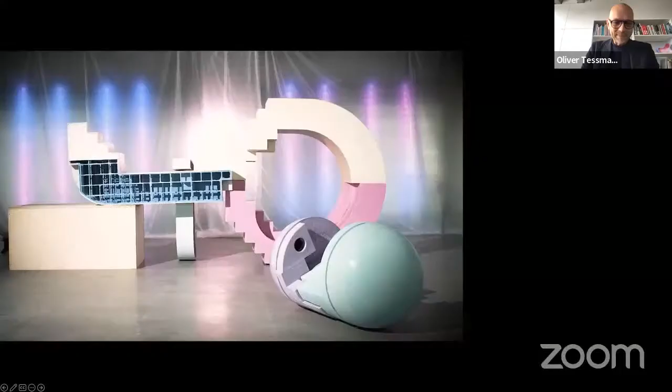Perfect. Good. Design to reassemble on the permanence of architectural matter. Before we go deeply into that topic, I would like to show you a movie of an installation that we recently finished, and you will understand very quickly after that why we did what you will see here. And there should be sound.

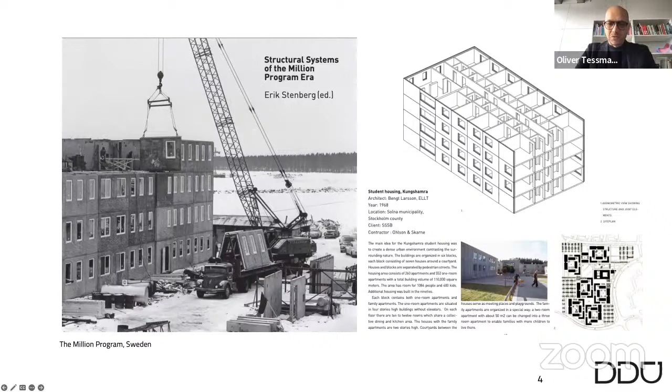Well, the panels landed, and I think we are all aware that the quality and the optimistic view of what prefab concrete could do did not always fulfill its promises. We are all aware of what serial repetition and monotonous suburban architecture did to the cities and to the built environment. However, prefab concrete can, of course, be used to create amazing spaces. And what you see here are images from the building that I'm currently in. It's the TU Darmstadt School of Architecture, which is a hybrid made from on-site, in situ, and prefab concrete. And the spaces from that 1968 building are really excellent as an architecture school, and I used a lot.

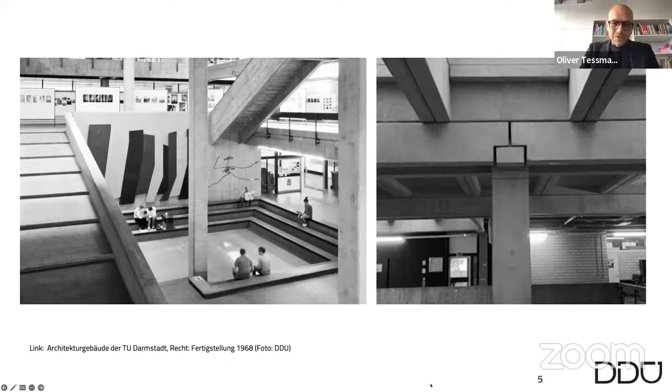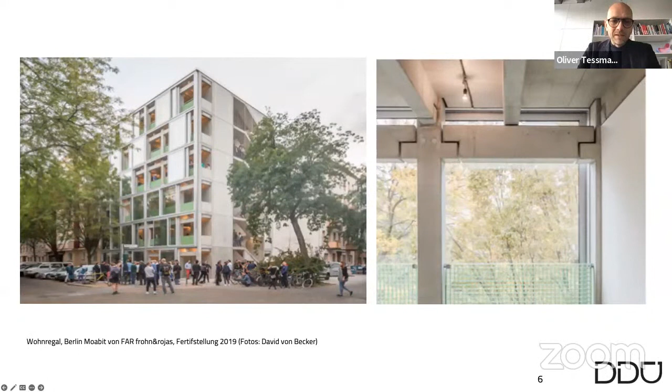What's interesting is that in 2019, this building by FAR frohn&rojas architects, an apartment building in Berlin, finished in 2019, won a couple of prizes for innovative and low-cost housing. And if we look at the prefab concrete details, and if we compare them to the building I'm sitting in, which had been built almost 50 years earlier, it looks like there's zero innovation in prefab concrete. The way we built prefab did not change in the last 50 years.

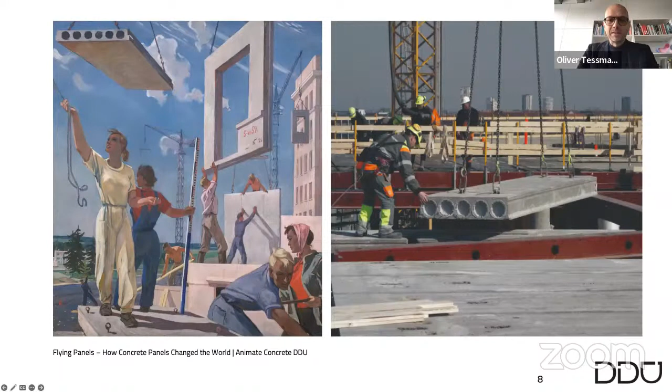This is a kind of scary observation against the background of the challenges we are currently facing globally, in the sense of climate change, in the sense of scarce resources. So what had been a vision in the post-war Soviet Union is the everyday of the construction site. This is what happens. So we have a lot of flying panels, and we all are aware of the fact that flying is quite CO2 intensive, right? So we think we should not fly so much any longer.

And also our concrete panels should maybe not fly so much. But in the future, we were wondering whether we could make them walk, we could make them wobble around, we could make them dance. And you just saw the video of dancers interacting with these elements. And the idea, which I will explain a little bit more in detail later, is that

if we think of elements that are not only used in one single building, but elements that can be assembled, disassembled, and reassembled in a new configuration, we actually might find answers to questions of CO2 emissions, questions of waste reduction in architecture. But we also might find completely new ways of configuring space, of reconfiguring space, and of humans interacting with these elements to form space and to change space. We have to solve that problem.

And the fact that concrete is a problem, I think, is very present, not only in our discipline, but it becomes more and more common sense. The Guardian wrote in 2019: concrete, the most destructive material on Earth. It's probably a little bit too easy, because concrete is also responsible, as we have previously seen, for providing housing for millions and billions of people. So it's not only destruction, but it also creates our cities, of course.

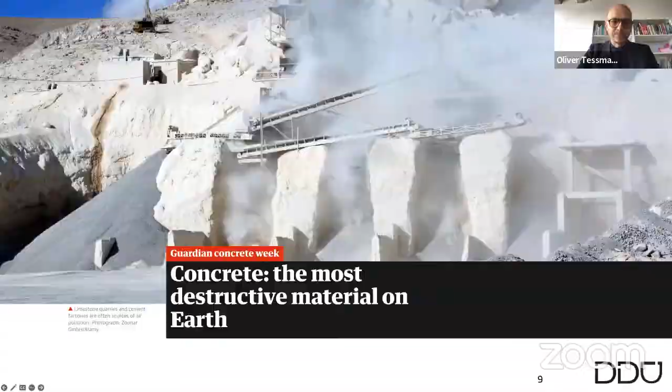However, a common anecdote is that if the cement producing industry were a country, it would be in place 3 after, I think, China and the US in terms of CO2 emissions. So it's no question that we have to address this problem. So do we now build everything out of timber?

Might be a problem. If you listen to Karen Scrivener from the EPFL in Lausanne, she said, if we wanted to replace just 1/4 of concrete with timber, we would have to plant new forests 1.5 times the size of India. So you guys don't want to live in a forest, I assume, not completely. And forests need time to grow. So timber is part of the answer, but it could never be a replacement for all of the things we currently use concrete for. So we have to find other ways to solve that problem.

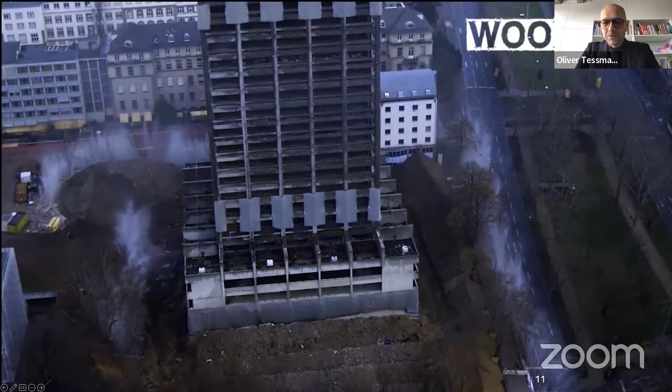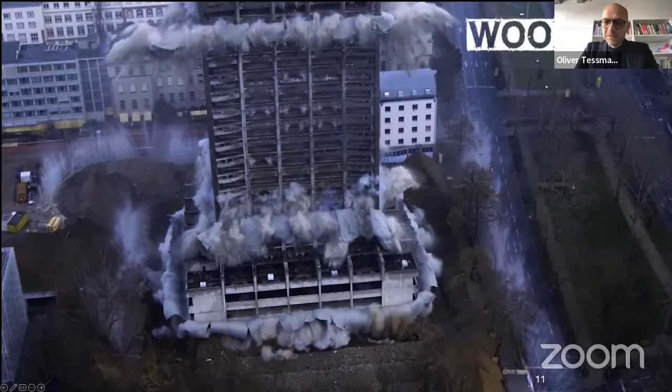And the first thing to look at is the question whether we really want to keep on doing something like that. Yeah, buildings being demolished and blasted, the elements with all their materials, with all their engineering know-how, design ambitions and resources are destroyed or downcycled. It's not because their structure or construction does not perform any longer, but rather because they are mostly economically obsolete.

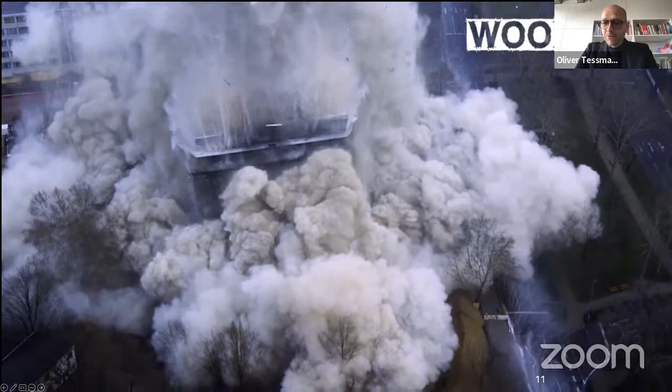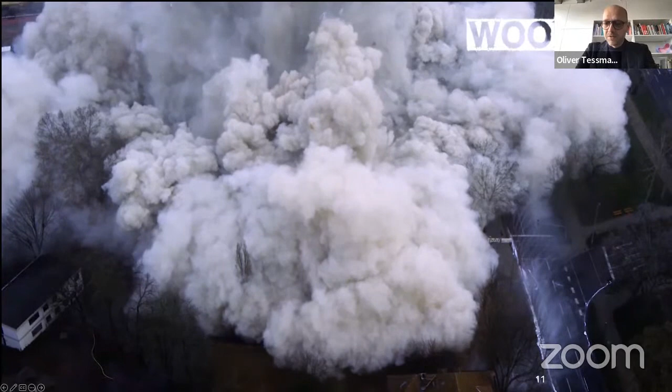This is the AfE Tower University building in Frankfurt that was demolished due to energetic problems, fire security regulations that changed, but not because of the structure being non-performing, say. So there's, of course, a kind of beauty in that movie that was beautifully shot by a team called Woodland Film, who were so kind to allow us to show their movie.

There's a beauty in the movie, but there's also a kind of craziness in destroying what is all there, especially if you look at this slide. On the left-hand side, you see the tower being built in the 1970s. In 2014, it was blasted to make space for a new high-rise, which, well, doesn't look so different to what has been there before.

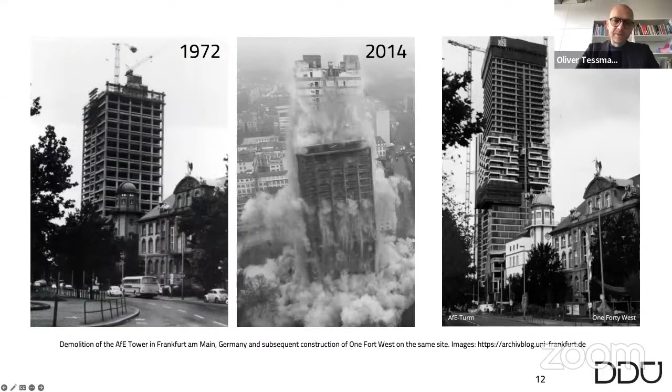So we need to ask ourselves whether this is the way to get rid of obsolete buildings and the way we build new buildings. At the digital design unit that I'm heading here in Darmstadt, we are interested in, as we just heard, computational design, digital fabrication, and robotics, and we think these things belong together. And for a couple of years, we have really redirected our forces to address these problems, these challenges that you have just seen.

And I will briefly talk about three research projects we are currently working on: scan, print, assemble, precast concrete components, and tactile robotic assembly. And all of them try to somehow relate to the question, how can we work with existing material? How can we build something new within an existing context? But also, how can we design something that can be disassembled and reassembled somewhere else?

So in architecture, permanence is usually regarded as the permanence of a building. And I think in our discipline as architects, we tend to design buildings that are made to stand there forever, or maybe for 100 years at least. What we see in a lot of cities where the ground becomes more and more expensive is that buildings are torn down after 20 years already, after 30 years. So there's no permanence in the building.

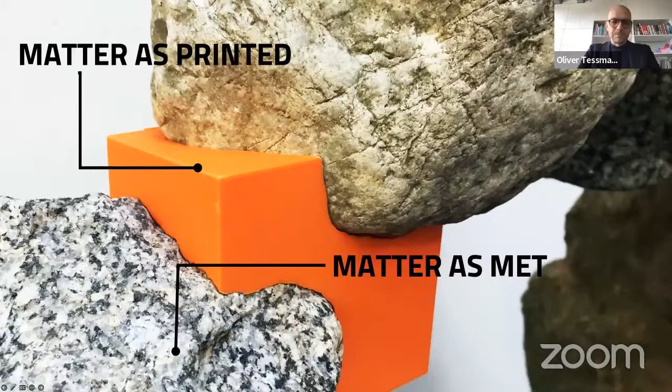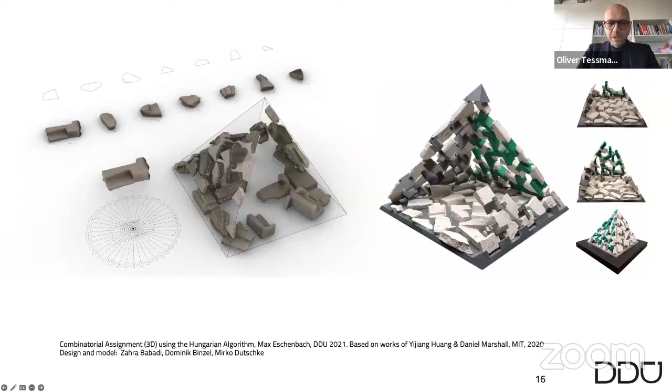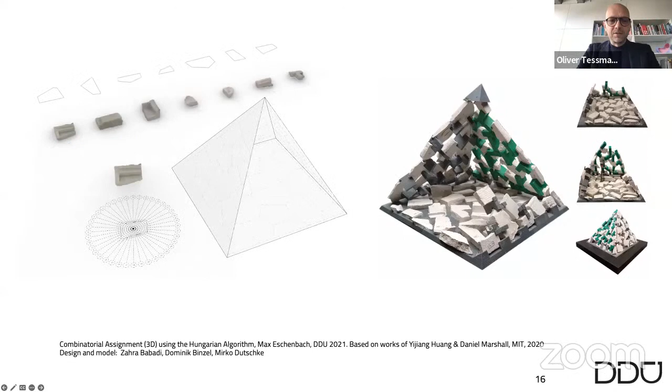To do that, and maybe also to find ways to reduce the amount of new material you have to add in between the existing parts, our team works on algorithmic procedures to categorize these kinds of random elements, broken elements. We try to assign geometric features and recognize these features, and then find methodologies that allow us to reconfigure and reassemble them in novel ways.

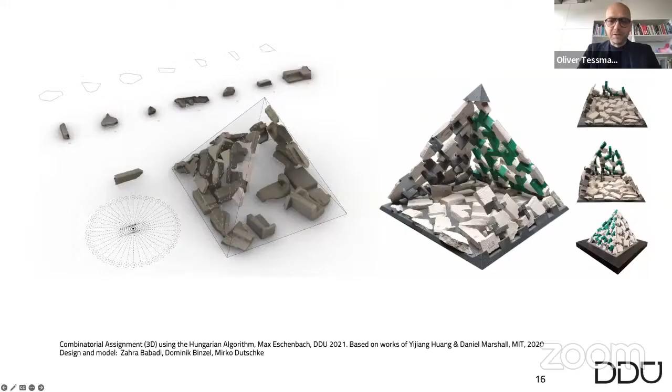We are also interested in using and reusing existing building elements. So instead of blasting a building and crunching it down into recycled concrete aggregates, here our student Katarina Koska developed a kind of narrative which she called the concrete hospital. And I really love this project where she says, well, whenever a building is meant to be torn down, we come and we harvest the elements. And well, they all might have a couple of problems. So they need to see the doctor.

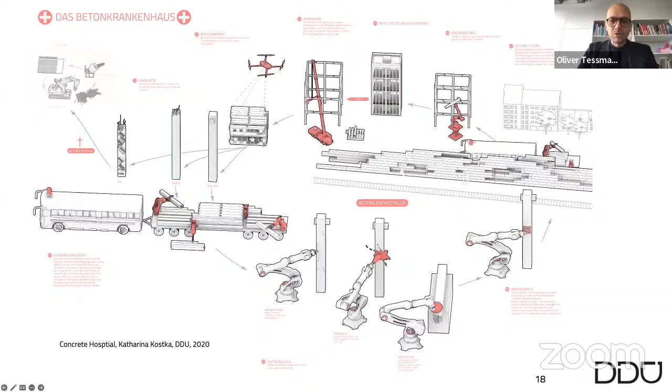So this is how we like to work in teaching, and how we like to work with our students to come up with ideas, maybe slightly crazy, but they actually are often starting points for research projects that we then work on. And this is exactly the case here in the concrete hospital. What came out of that hospital was a project called Precast Concrete Components 2.0. And we kind of reduced the narrative slightly.

We said, well, if there is an old and existing obsolete steel reinforced concrete skeleton, which is meant to be broken down, we come and scan it and develop a kind of decomposition plan. So it's like construction, but the other way around. And that will provide us with elements. They will be scanned so that we make them digital. And in the digital, they run through the entire geometric feature recognition process.

But we can also look at surface qualities. We can look at the reinforcement. And then in the digital, we develop plans of how we need to treat them. They need to be cut. They need new connection details to then become a new precast concrete component, precast concrete component 2.0. In German it's a little bit more handy title, Fertigteil 2.0.

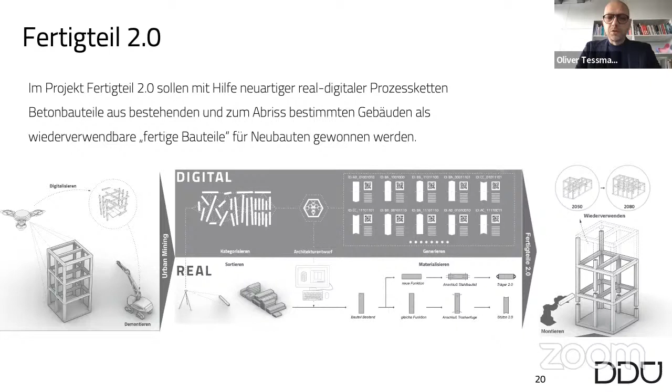So what you need to start with, it's quite loud.

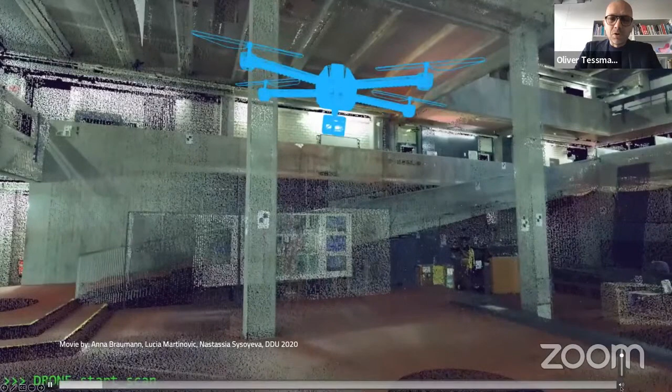What you need to start with, of course, is you have to 3D scan the existing context. And again, you might recognize that we are in the Darmstadt Faculty of Architecture building that we 3D scanned with our students. And then we took that point cloud and used it to make this movie. The idea here is that within such a point cloud, we would identify the beams, but also the columns that could become the members of a future building.

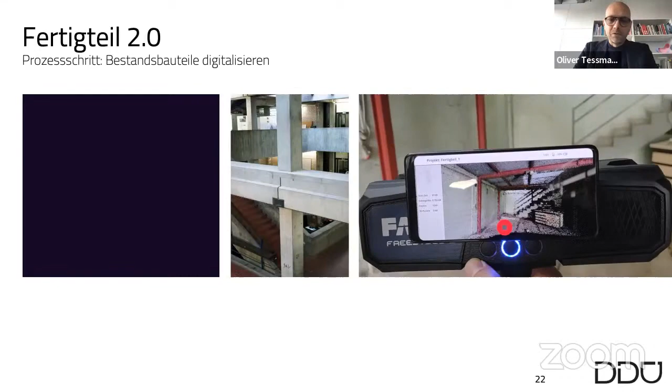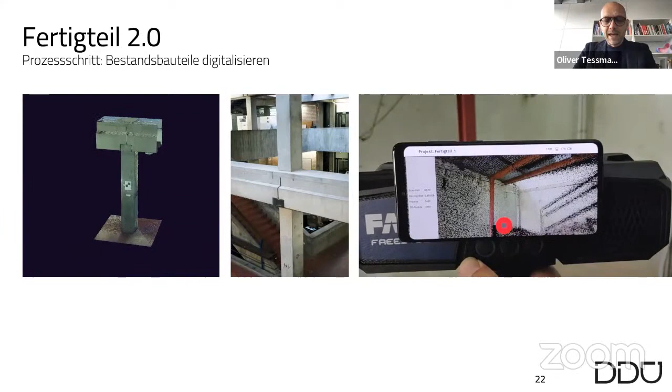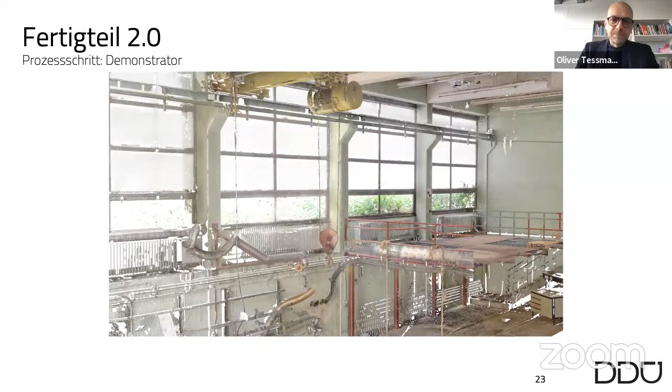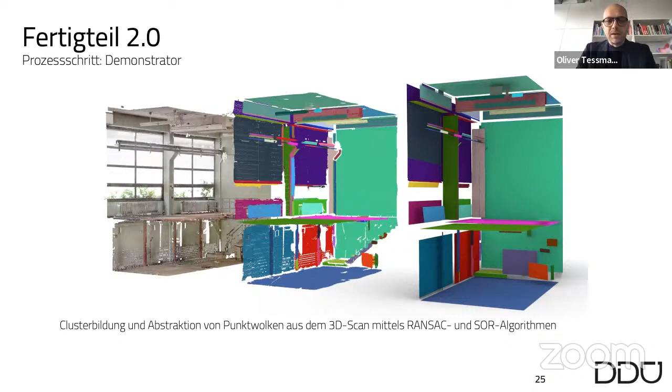And if you are able to do these scans as a building owner, you might have a lot of information whether your building is worth to be used as a building or as a material storage for a future building. Together with Faro, our scanning expert, we then redid this process with a hand scanning device that you can see here on the right-hand side to turn something like this industrial building into a point cloud, and then out of that point cloud identify certain vertical and horizontal areas that could then be readjusted in the digital model into architectural elements for future reuse.

Our colleagues in Braunschweig then look at ways of how to cut such a building into pieces, which kind of pieces can be harvested, and then we work again on algorithms that are recombining these elements into new structures.

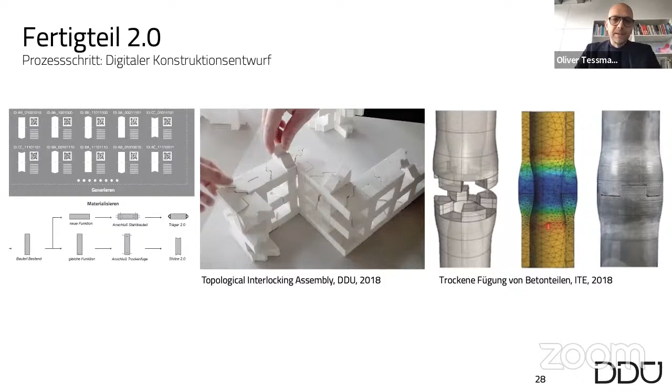So if you want to assemble, reassemble, and disassemble, you have to make sure that you don't glue any element to another element, that you don't use any mortar. What you need is dry joint connections. You connect elements by interlocking them, and this interlocking is reversible, so you can put that into single pieces again. And this is what we look at in this process. And then on one hand, we develop the new details on the right-hand side, how these things could come together.

And on the other side, we use computation and the power of computers, not as we have seen in the last 15 years of digital fabrication, to make unique elements, but we rather use the computational power to calculate how elements could be aggregated and what are the different ways of aggregating the same elements together. So what you see here are 40 elements that are aggregated in hundreds and thousands of different ways. This is something you could, of course, manually test, but it's much faster if you let the computer run through the different versions of aggregating.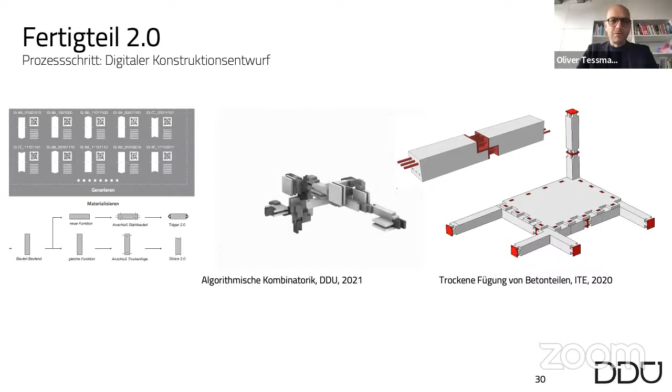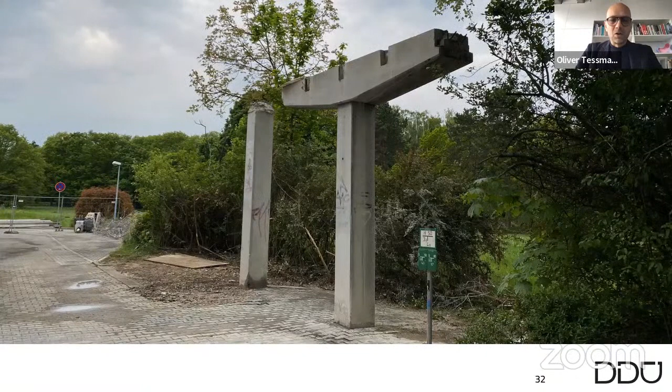So to make that happen, to harvest elements, we actually found something that was really not needed any longer at the TU Darmstadt campus. It's this bridge, and it was meant to be torn down, and we said, hey, we would like to harvest a couple of elements. So it was broken down, and then the two columns were left. And, again, very noisy. We found a guy who likes sawing concrete, and he supported us here in harvesting these concrete elements. And you can see on the left-hand side, they cut and suddenly the column is dancing. It becomes a flying panel, so to say.

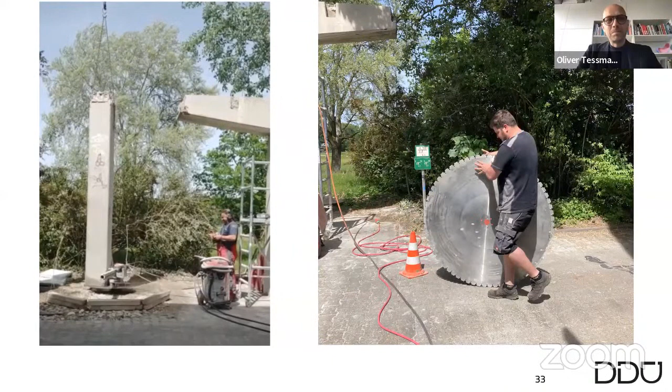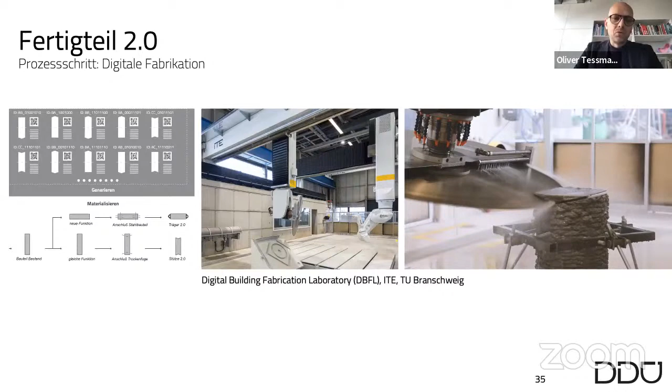There's a crane pulling, and we harvest a couple of these old pieces, and these pieces were then shipped to Braunschweig, to our partner Harald Kloft, who, as you can see here on the middle image, puts big sawing blades to robots, which allows him to very precisely cut elements, and he can then create cuts that allow for new details for dry joint connections.

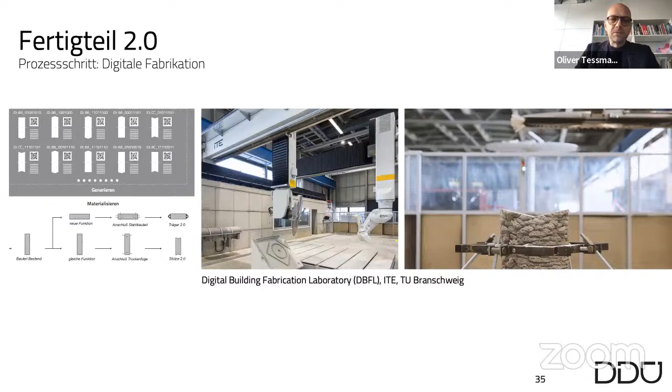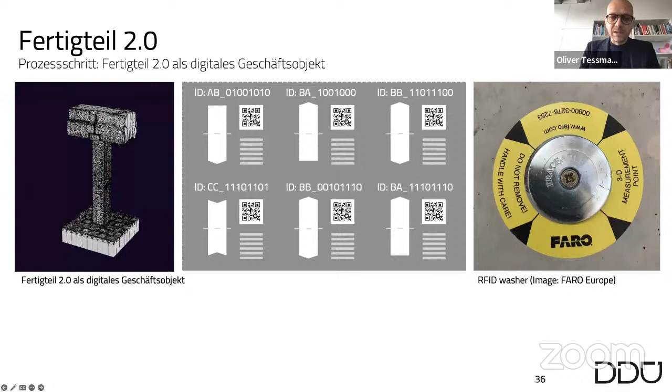And then in that research project, we of course look at the life cycle of such an element, and we explore whether it really makes sense to reuse these concrete components, and we compare these reuse scenarios, which of course include transport and storing and cutting. We compare all these aspects to fabricating new elements, and we are in the process of doing that. What I can say is it makes sense to reuse, even if there's a bit more work in cutting and transporting.

So this project is really about bringing old stuff into the new context. But of course, we should also, as architects, think about how can we design new elements, new modular systems in a way that they can be reused. And again, this is a project which is called Tactile Robotic Assembly. Here we explore how we can reversibly join and interlock elements so that they can be reused in different configurations.

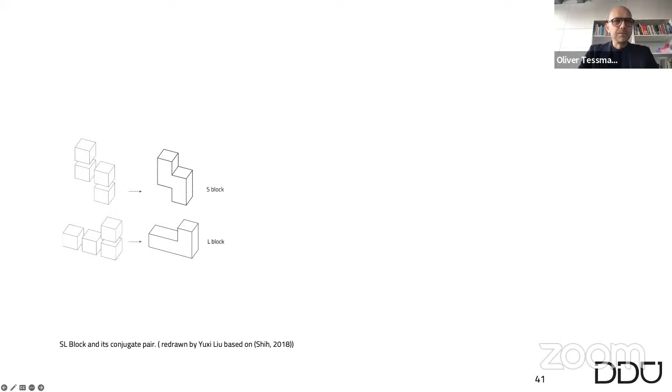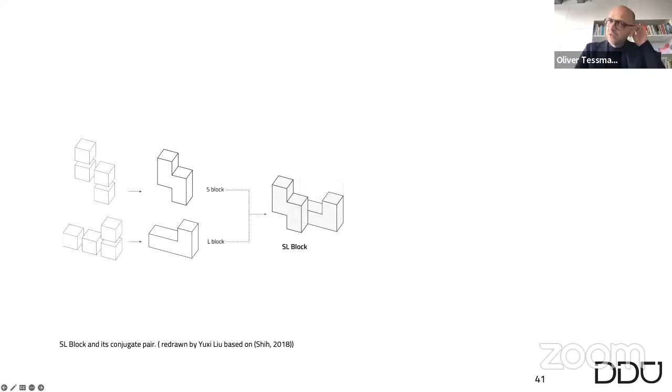And since that is a tedious process to assemble and disassemble, we thought it would be nice to delegate that task to robots so that they autonomously put structures together, but they could also then disassemble them and put them into new configurations. The whole research is based on one single modular element, which consists of 8 cubes, as you can see on the left. 4 of them form an S shape, 4 of them form an L shape, and then together they are called SL block, which we did not invent, but it was developed by a Taiwanese researcher called Shih around 2018, when he published his first papers.

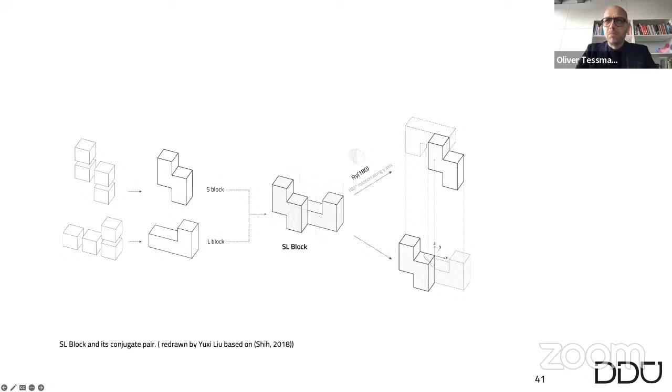What's interesting about these SL blocks is that they can be combined, and if you combine them, they interlock. And they can be interlocked in many different ways. Sorry. And these different ways how elements come together are called engagements. That's a term that she coined in this context. And different engagements lead to different shapes. You can have linear shapes, diagonal shapes, spiraling shapes, very monolithic and block-like shapes. And so with one single module, you can create a multitude of different shapes.

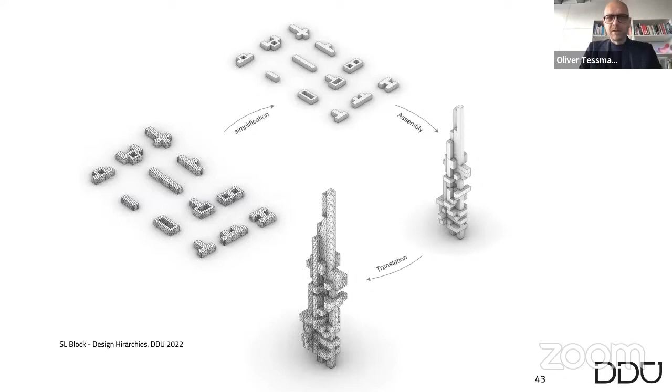And this is, we think, a very interesting approach where you can put these SL blocks together to become beams, to become columns. So we could kind of simplify them and see them as single elements. Hundreds of SL blocks form one single beam, and then one single beam could be assembled into a structure. So you create a kind of hierarchy of small blocks forming larger elements that are then aggregated into architectural constructions.

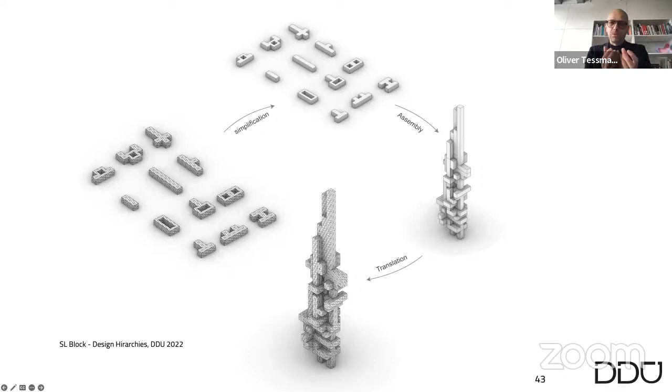This is what we are exploring currently. We look at the algorithms that either top-down take a large volume and break it down into SL block engagements, or we do it bottom-up, that we start with a single module that we aggregate to form different larger global

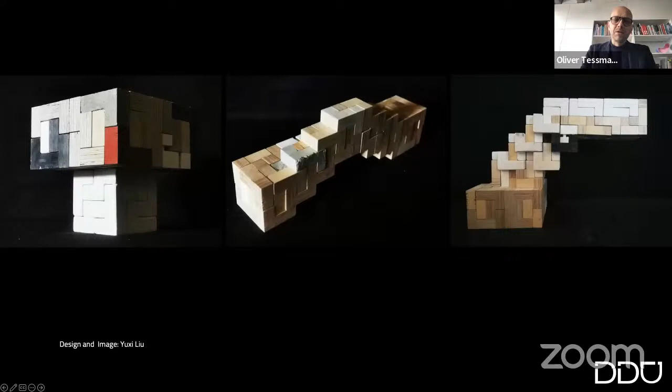forms. We do that digitally in the computer, but it's also fun to do that physically, to put elements together, elements that are made from different materials, because it's the geometry and the topology of how they interlock that is, let's say, the common denominator for the elements, so that various materials could be combined to form new structures.

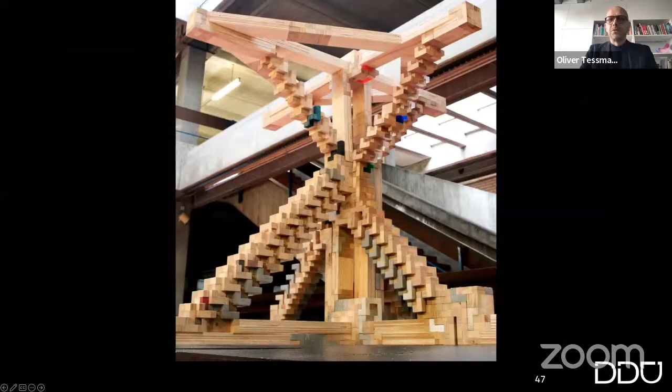This was a master thesis modeled by Yuxi Liu, who then, after doing the master thesis, immediately started becoming a researcher at the DDU and continues to work on these SL block configurations. We furthermore teamed up with the roboticists at the TU Darmstadt.

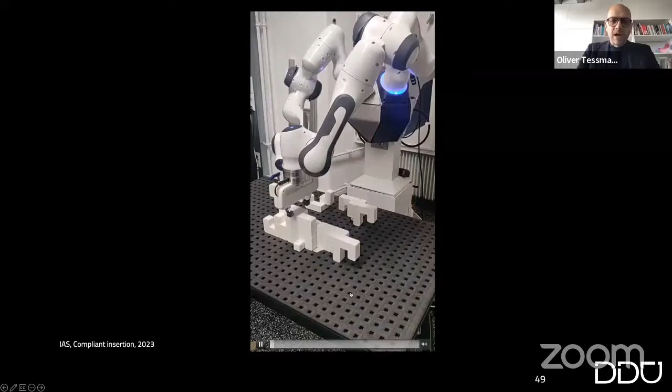Now, teaming up with computer scientists and roboticists from TU Darmstadt allowed us to test other ways to assemble and also to test other hardware to do that. What you can see here is a dual-armed robot called Franka Panda. And that robot is equipped with torque sensors in all of his joints.

So that robot is aware of collisions that might happen. And if he tries to assemble elements and he's not perfectly finding the right spot, he might be a few millimeters off. Then what he can do is to make his joints soft, so that there's a certain flexibility in this moment

of assembling elements. So what we did here is we 3D printed those SL blocks, and you can see that they have rounded off edges, which allows them to slide into each other. So assembly is a little bit easier because there's a moment of almost self-calibration where two blocks meet, they slide into each other, and the robot is soft enough to support that process.

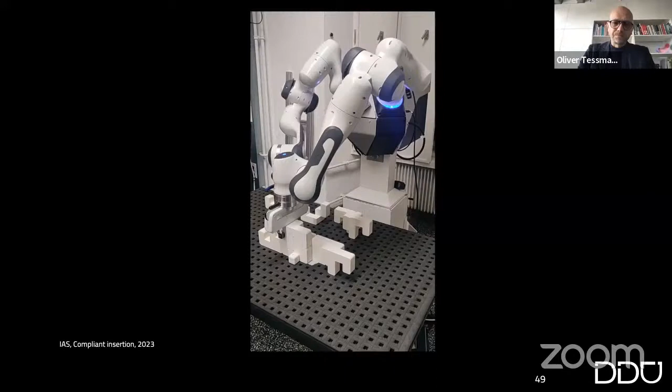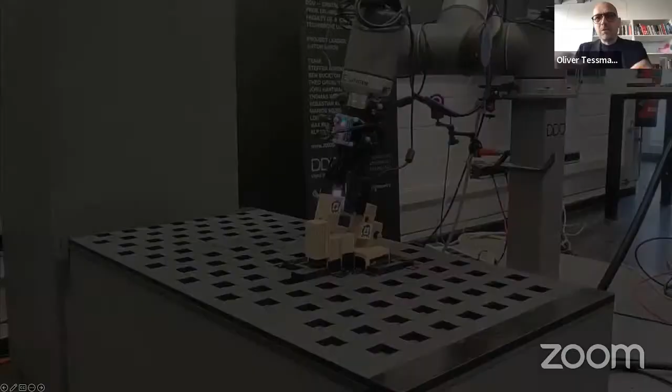The other approach that we had been working on with our roboticists is to use artificial intelligence. In this case, it was a machine learning approach where the robot tries to put these elements together, and whenever there is a certain friction, he stops and he tries to approach this assembly moment from a different direction.

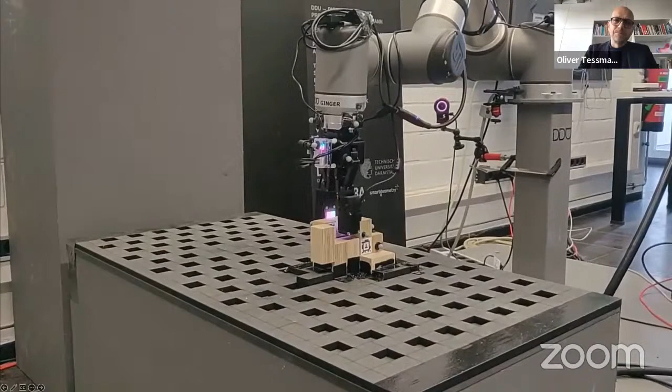And the whole measurement and the sensing of frictions and problems during the assembly is done by this gripper. You see the lights in that gripper. It's a system which is called tactile sensing, which allows the robot to understand whether there are collisions, whether there's too much friction to put things together. And then you can see that he tries to put the element together in different ways.

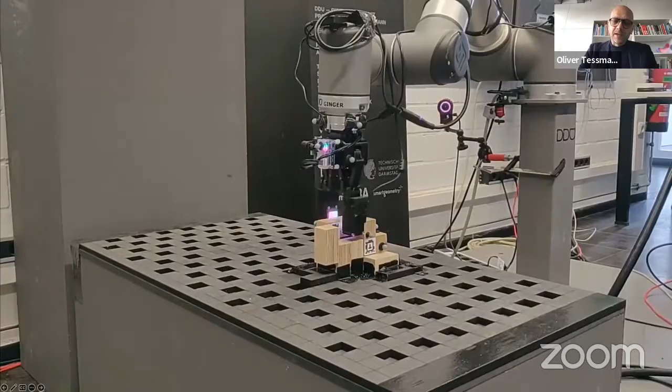And what he's done here is he records the movements that he does, guided by the human. He records the accelerations of the joints, the movements, the positions. So he has a kind of principal idea of how table tennis works. And then he's asked to do it himself.

And you have to imagine that room being equipped with a camera system that can see whether a ball hits the table or is off. And whenever the ball hits the table, the robot gets a reward. And whenever it is off, it gets punished. And by that, the system starts to learn to play table tennis.

And when we saw that movie, we thought, hey guys, this is the perfect technology that we could use to assemble blocks. So very similar approaches were used in the previous video of putting SL blocks together.

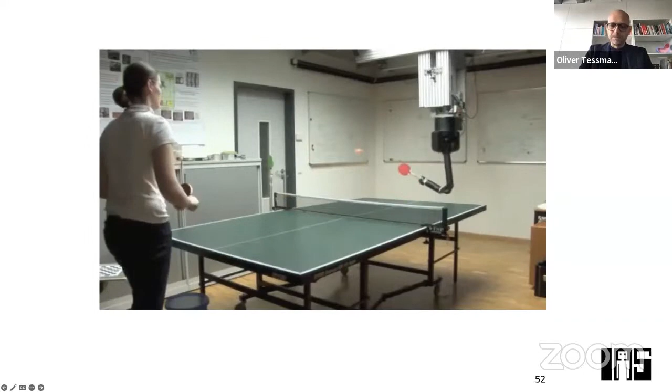Again, with the conceptual idea of assembling, disassembling, and reassembling, with the idea of maybe seeing these SL blocks not as scaled down models, but maybe in the future we put a lot of small elements together to form construction elements like beams. And the permanence and durability of matter is not in the beam itself, but it would be in the SL block that travels from one construction site and one building to the next one.

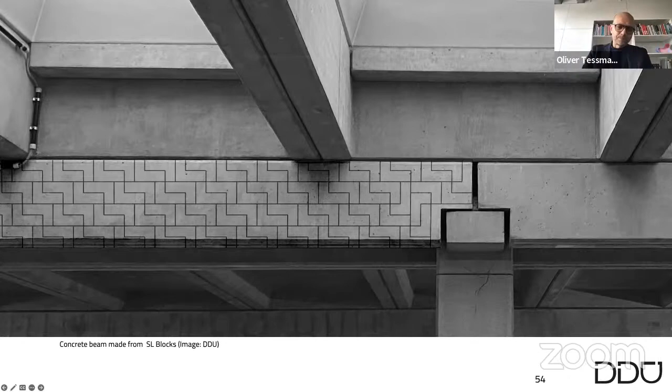And in case they are a little bit bigger, then it would be nice to allow for interaction between elements and humans, and to not make them too heavy. It's good to have hollow elements. It also saves a lot of concrete material. And the technology we use here is called rotomolding.

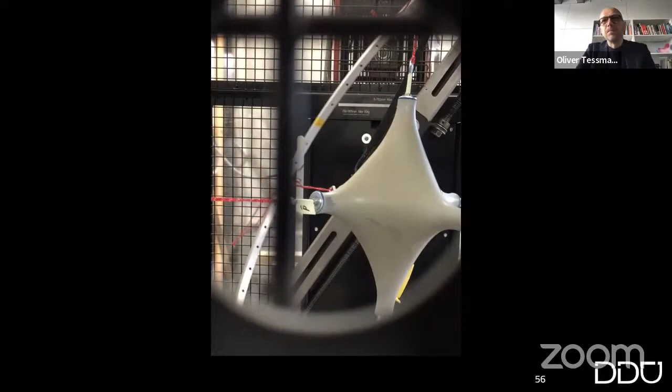And what you see here is actually a balloon that we pre-stressed as a membrane. And then we pour in concrete, and then we rotate that element, and what happens is that the concrete evenly distributes at this membrane surface, and what you generate is a hollow object which is lightweight. You wouldn't be able to carry a massive concrete block with your arm like this. It's hollow, it's sequentially casted, so we can vary the thickness of the element wall, the wall thickness.

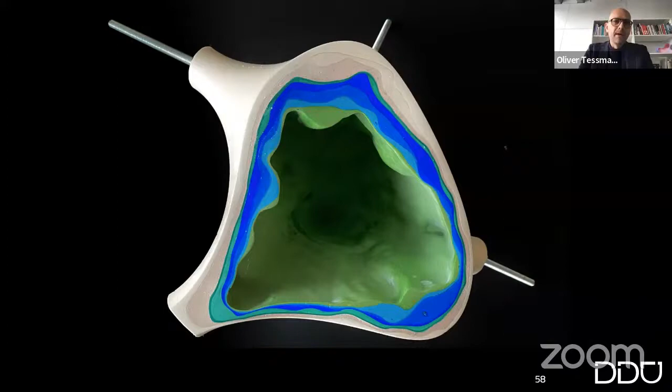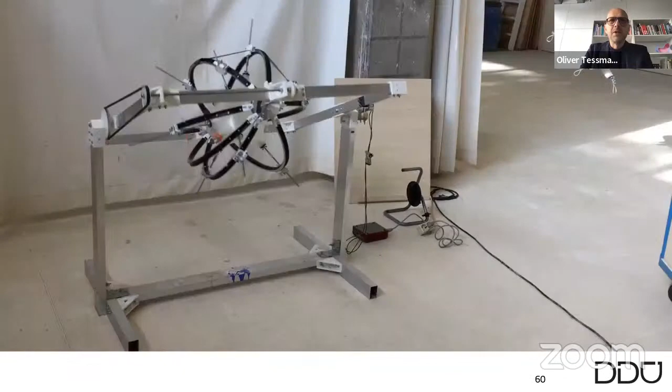And again, we work with students on developing new kinds of formwork systems where we tension the membrane, where we are in control, geometric control of how this element is tensioned. We developed new machines for rotomolding, and in this case, it was used to build a kind of node system for space frame structure. We explored with our students various ways of how that could be used, and I very quickly go through that because I run out of time.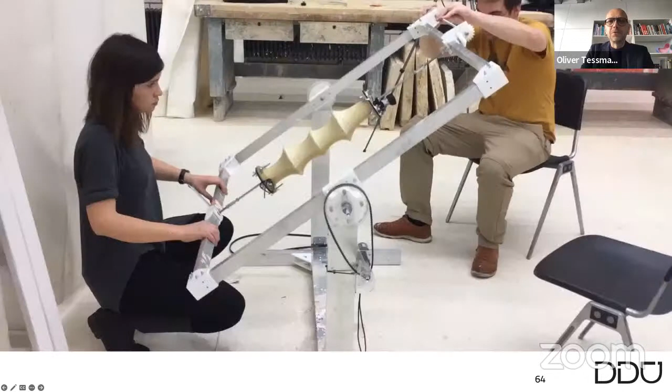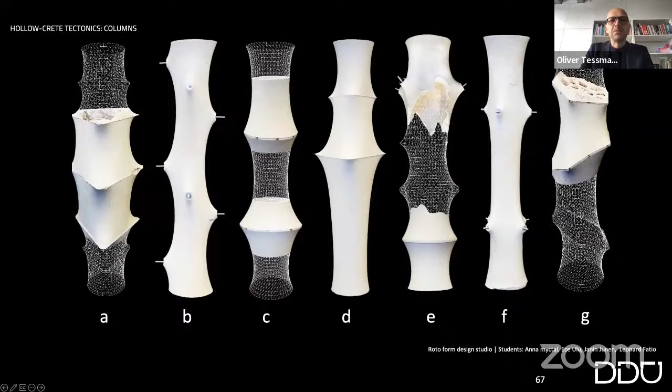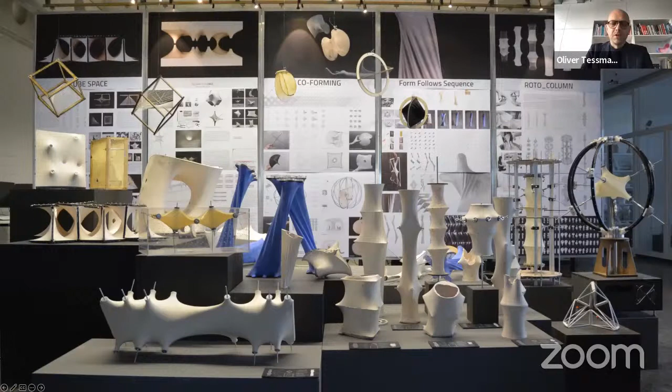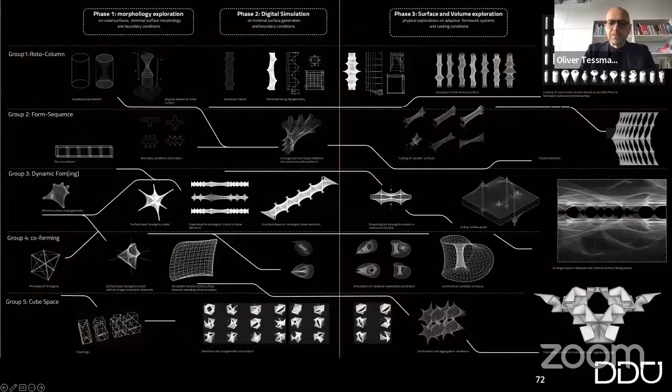So it could be columns, producing columns, building machines. Get your hands dirty in our studio to do something like this. Sometimes they break and you only have the digital representation as a mesh. Sometimes it works out. Could be a flooring or ceiling panel. It could be a beam. It could be modules. So this is something that we explored in a design studio with our students, and we try to develop a kind of phylogenesis to identify where are the most promising locations for using this technology for building elements.

We scaled the process. We scaled it up together with an industry partner and a larger robot to build these kind of column systems. And again, what you see here are hollow elements that form a column. Now, if an element is hollow, it might have its center of mass in a location where you would not expect it to be.

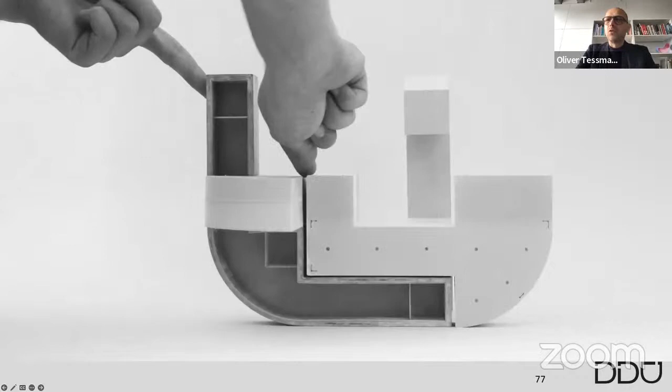And what I mean by this can be shown in the Animate Concrete project. This is not us, this is David Henry, an artist, and there's quite a bit of wobbling going on, and we clearly see that putting the center of mass of that thing very low allows you to do crazy things with a piece of concrete. And this is something we were interested in transforming into an architectural context. Think of dry joint elements that could be rotated, but then combined and interlocked to together form something new.

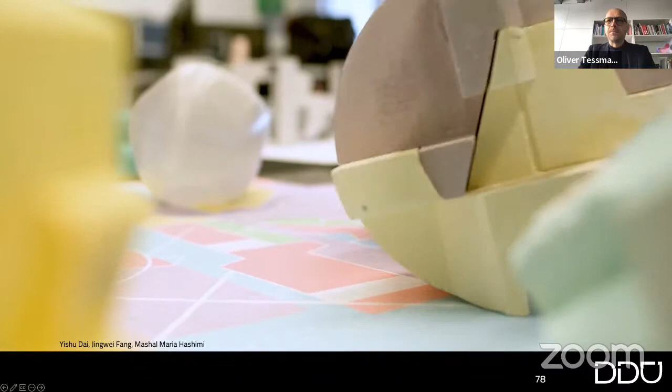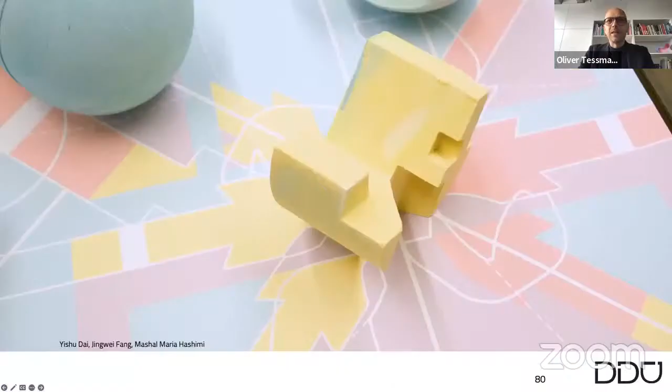And I'll rush a little bit through these images. So interlocking structures that roll, that have their own kind of behavior, that are almost characters, that move on a plane, that dance like a choreography. And it again requires new ways of designing them. How do they interlock when they move? Our team developed a couple of extremely beautiful, I think, drawings of how these things come together, physical models to test that. Sometimes goes wrong.

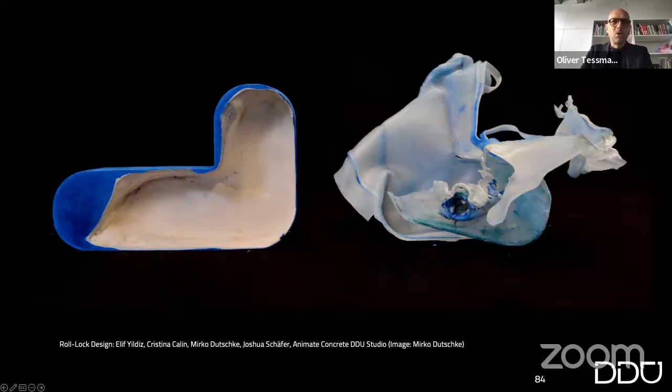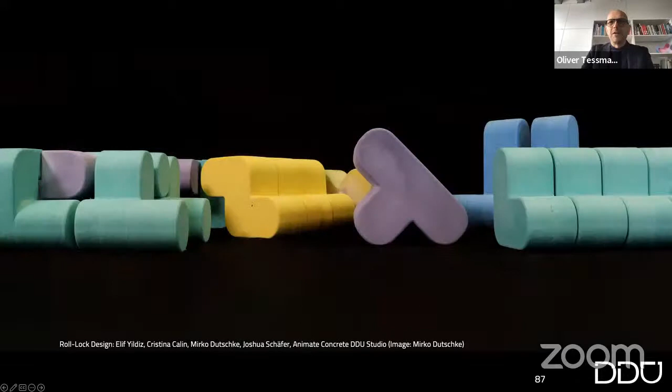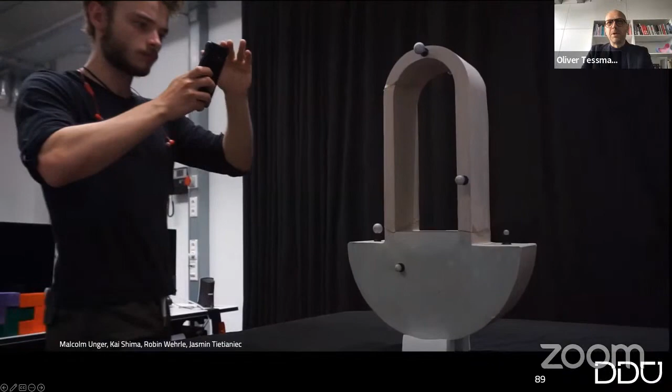Here you can see on the left-hand side that the center of mass is, of course, put to the very left of the object by making it massive at that point. You don't see that from the outside, and you are then sometimes surprised by the weird behavior of the elements in motion. And to understand that a little bit better, we motion captured them, pushed them to move, and explored the different movement pattern. I rushed through that.

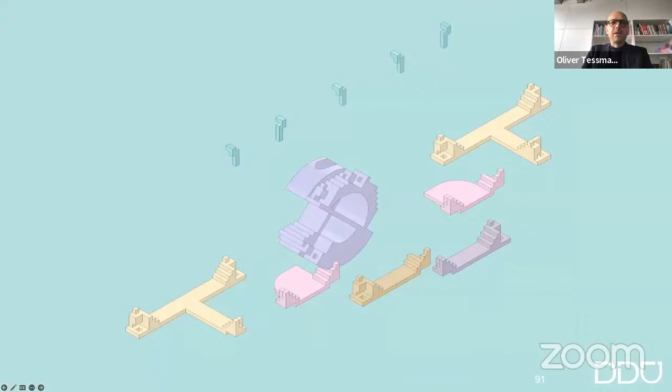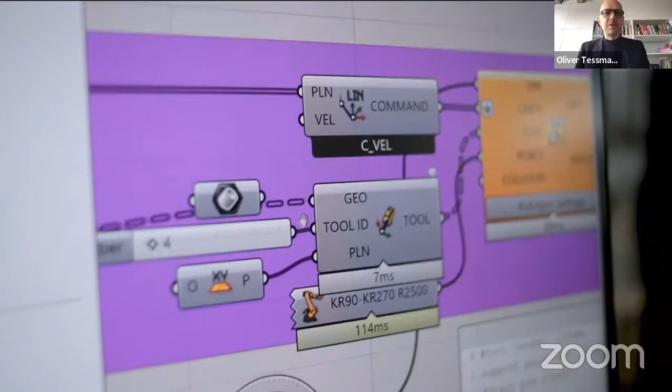You can see some results from the studio, and the aim in this case was to design elements that could be composed in different ways. You can put them together in one way, and then disassemble them and reassemble them in other ways. And we then luckily got invited for an exhibition called Robots That Build in the Netherlands, and we used this invitation to develop a larger installation, which you have seen in the beginning of that movie.

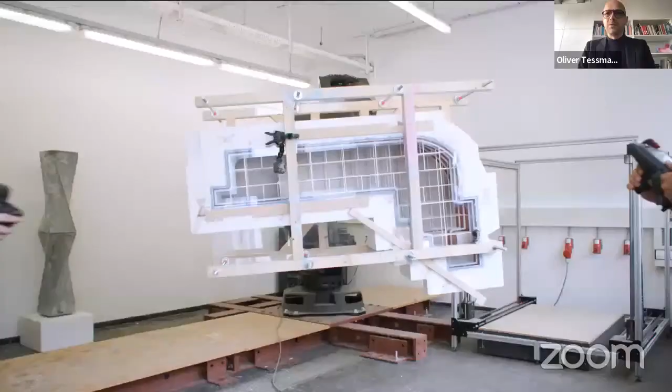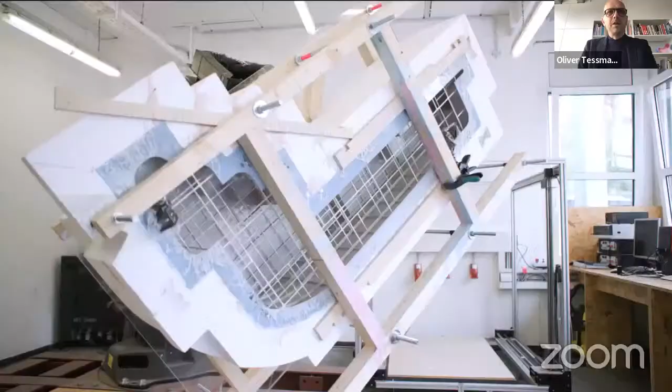So students designed these pieces that were then realized through rotoforming them, and there are some images that you can see here. So mixing material, having the formwork linked to the robot, put in the liquid material, and then use the robot to distribute the material along the formwork system, leading to elements that are hollow, that are lightweight, and that allow people to interact with them, to rearrange them, and to rearrange space. And I think that's the end of my talk.